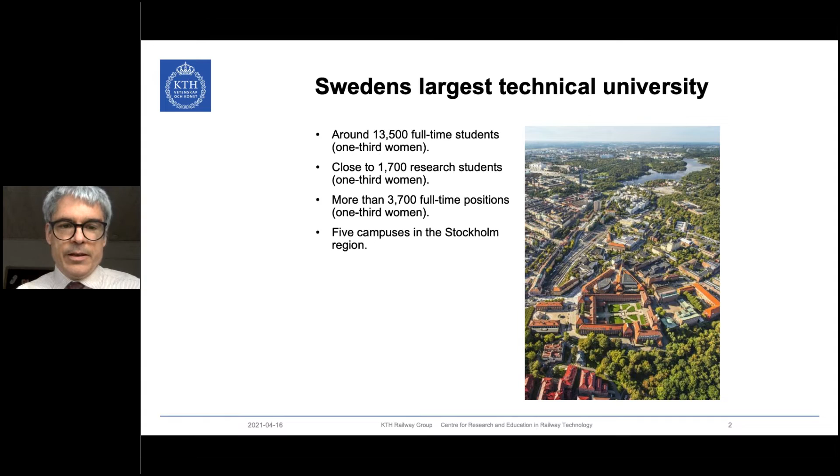Since all of you might not know where I'm from, a very short introduction here. I'm from the Royal Institute of Technology in Stockholm, Sweden, which is the largest Swedish technical university. We have 5 campuses in the Stockholm region. And I'm also, as Chris introduced, director of the KTH Railway Group, which is a multidisciplinary railway research center at our university. We conduct research and actually also education in many different fields of railway engineering. We are in civil, electrical, and mechanical engineering, and you can see just some examples.

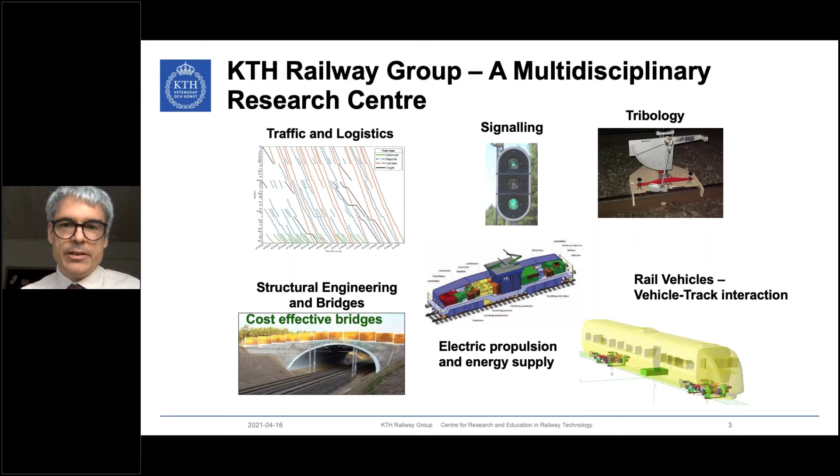We deal with train traffic planning, scheduling, as you can see here, traffic and logistics, with signaling, tribology issues. We have quite a large group working on railway bridges, also quite a big group in electrical engineering working on power supply and electrical propulsion systems. And then we have the group where I am from, the rail vehicle group, that mainly works on vehicle track interaction.

On the next slide, you get a short impression on what the research focus in our group is. As said, it's mainly on the dynamic vehicle track interaction with topics like ride comfort, contact mechanics, damage prediction, active suspension, tilting trains, crosswind stability, and condition monitoring. But we also have some projects on energy usage and environmental impact of railways, lightweight structures, and vehicle catenary interaction.

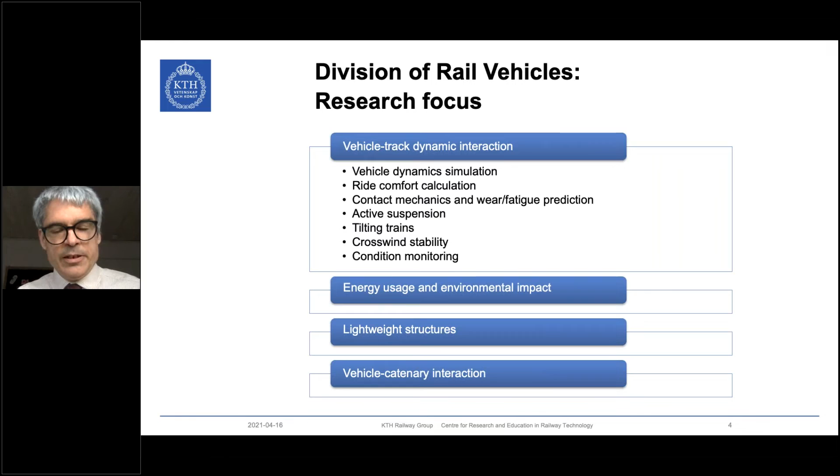And finally, before really starting with the topic today, I don't need to say so much anymore because, Chris, you mentioned it already. We actually have a quite close cooperation between the KTH Railway Group and the RailTec Center. And as you said, it goes quite many years back. And since 2018, we have it officially our joint master program in railway engineering, where students in parallel start at UIUC in Illinois and at KTH.

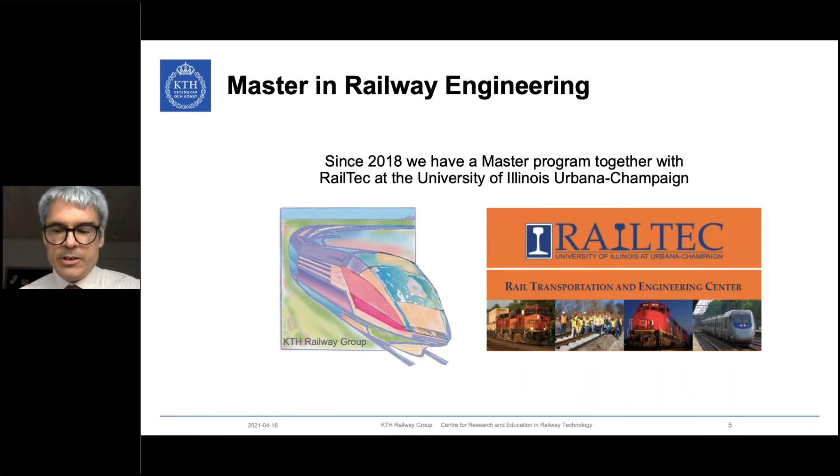Okay, but now to the topic of today. What will I be talking about? After a very short introduction, I will mainly try to explain to you what we are doing by examples. I will not talk so much about theory, but by some examples of what we are doing, hopefully give you an impression on what it is and how it could be used.

I will talk about how our calculations could be used for optimizing grinding intervals, for wheel life prediction, shortly a bit on our activities on machine learning, which are much newer than the other activities, and then shortly summarizing it.

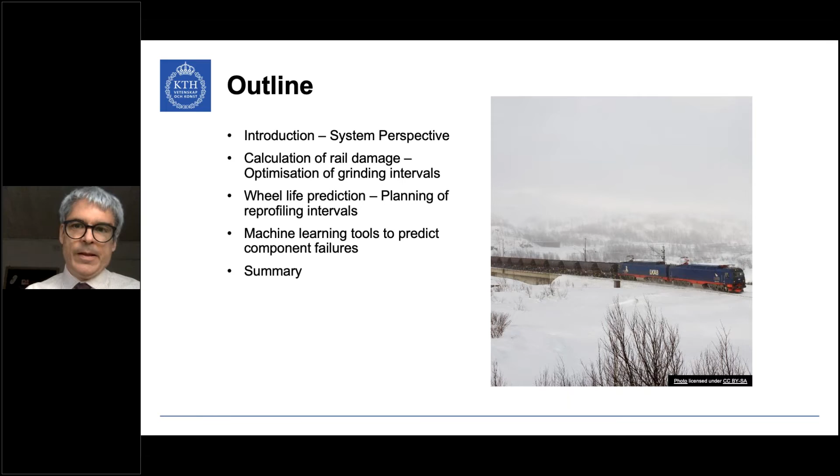As a background, Chris also mentioned it very shortly. Rail damage, rail wear, and RCF, for example, according to information from Trafikverket, which is the infrastructure owner in Sweden, accounts for about 40% of the maintenance and renewal costs in the Swedish network. And also wheel maintenance and renewal is a significant part of the operational costs for the vehicle side. So if you can save some money there, you can save a lot for the total operation cost of a railway system. Another issue is that wear and rolling contact fatigue are interlinked.

You can't really look at one of the phenomena isolated. You always have to look at them in combination. A very obvious reason is that initiated cracks can be worn away if you have wear, which you always have between wheel and rail. So actually a certain amount of wear can be beneficial to not have too fast crack growth in your system. And third bullet point here is that also maintenance activities influence the wheel-rail dynamic interaction. When you reprofile the wheels or when you grind the rails, then you change the geometric interaction between the two contact partners, and that also changes the dynamic performance of the vehicle on the track.

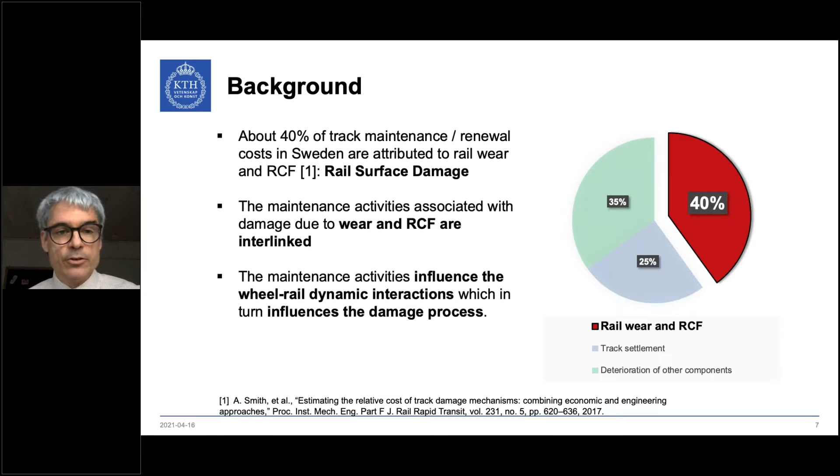So it's a quite complex system that needs a lot of detailed attention if you really want to model it in a good way and get good predictions of the system behavior.

In that aspect, it is also, as I said, a system tool, the wheel rail damage prediction. What would we like to achieve? Like most people would like to achieve higher infrastructure availability, reduce track maintenance, reduce costs due to delays, lower operating costs, and the same on the vehicle side, reduced vehicle maintenance, higher vehicle availability, but also better ride comfort and less running instability, this hunting motion.

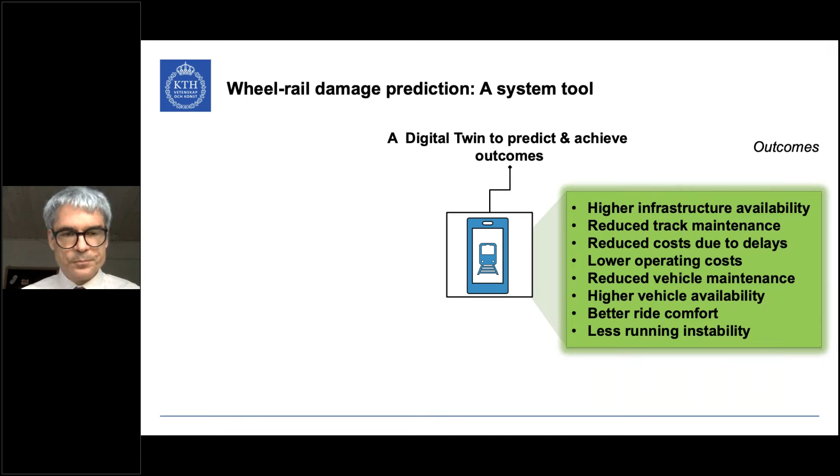To build a digital twin of the system to predict wheel or rail damage, you need quite a lot of different bricks, as I've indicated on the left side. Firstly, you need good multi-body simulation models that really represent reality. You have to deal quite a lot with contact mechanics. You need to post-process the outputs from the dynamic simulation, so you need damage models - how to go from measures like creepages and contact forces to calculating the damage from them.

You need to deal a little bit with numerics, because all these simulations, as you will see later, are iterative, so it can be quite time consuming to do these calculations. Good numerics is also important.

When you want to optimize the system, it's also about optimization - for example, the vehicle suspension design, or you might want to optimize the wheel rail interface management. As I already indicated in the beginning, the geometric interaction between wheel and rail is extremely important. I won't go into the rest of these bullet points.

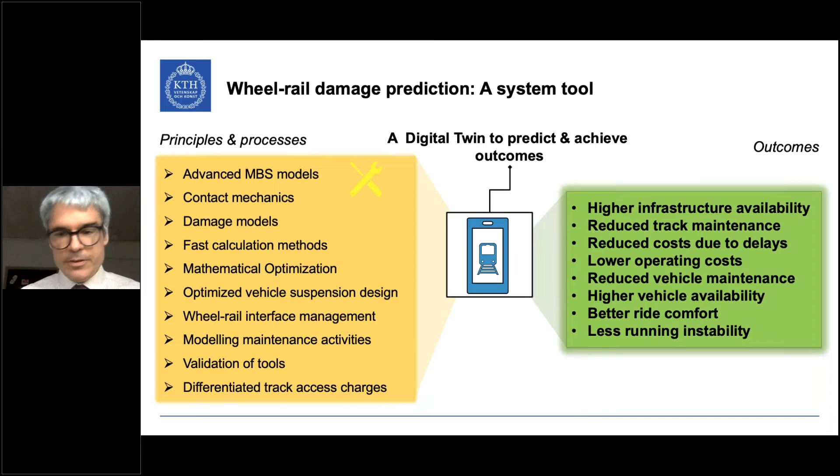We have been dealing with this topic for quite a long time, as you can see on this slide. The first thesis that one of our students did on the topic was in 1999 - the first wheel wear prediction algorithm, at that time for a freight vehicle. Then several theses updated and extended the work - for example, Enblom dealt with RCF, and my colleague Carlos Casanueva worked on switches.

Babette Dirks, for the first time in a systematic way, coupled RCF and wear. Then in 2016, we had one thesis that dealt only with contact mechanics, actually developing a non-Hertzian contact theory needed for exact prediction of damage, but that still needed to be numerically efficient to not extend the simulation times too much, even though the contact mechanics are more exact.

The works which I'll mainly talk about today are, on one hand, from our colleague Saeed Hossein-Nia, who finished his thesis in 2017 and is now a researcher in our group, and Vishak Krishna, who will defend his thesis this fall.

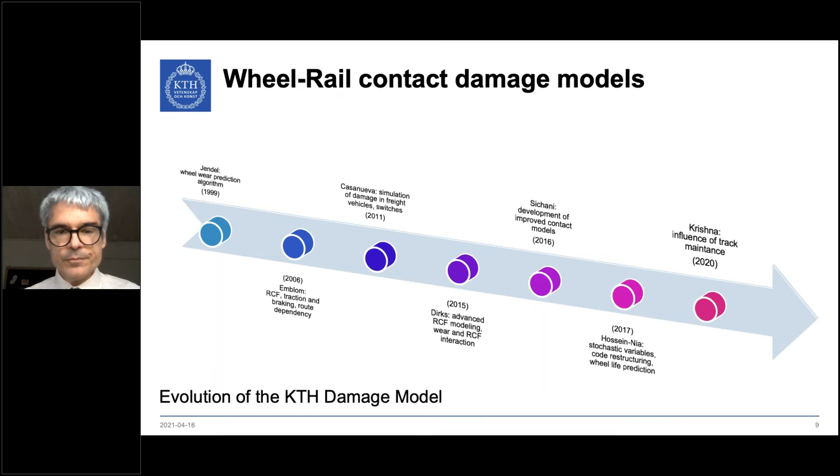As already indicated, the examples I will take up are calculating rail damage in combination with grinding actions, wheel damage with one short example from a recent master thesis, and then finally, though it's not the major part of the presentation, a bit about our recent activities on machine learning.

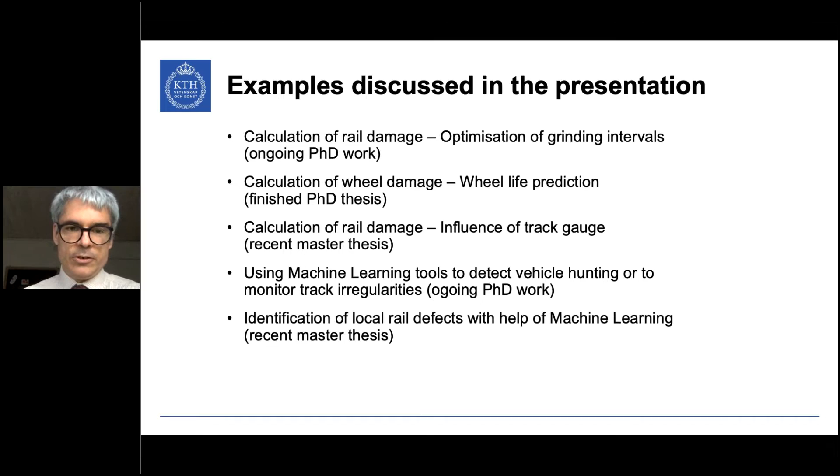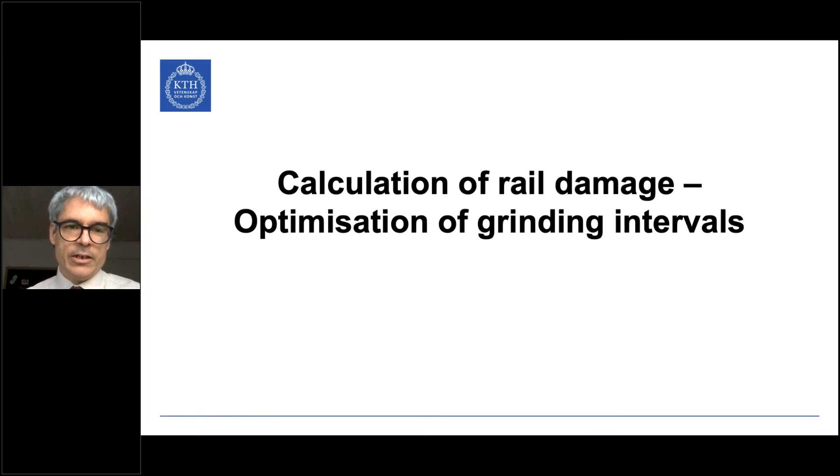I'll start with the work mainly from Vishak Krishna on calculation of rail damage taking grinding actions into account. To explain why we are doing this, I show here measurements that are actually from Germany.

Rail measurements on a rail cross section over 9 years. What you can see is time on the x-axis and wear volume - the volume worn away - on the y-axis. You wear away material due to operation, which you can see by this arrow - that's the wear you get throughout the years from trains passing that cross section. But you also get a significant amount of wear from the grinding actions.

If you do not take that into account when you calculate the iterative change of rail profile, and in turn the interaction between wheel and rail, you miss an important part of what happens with the rail during its life.

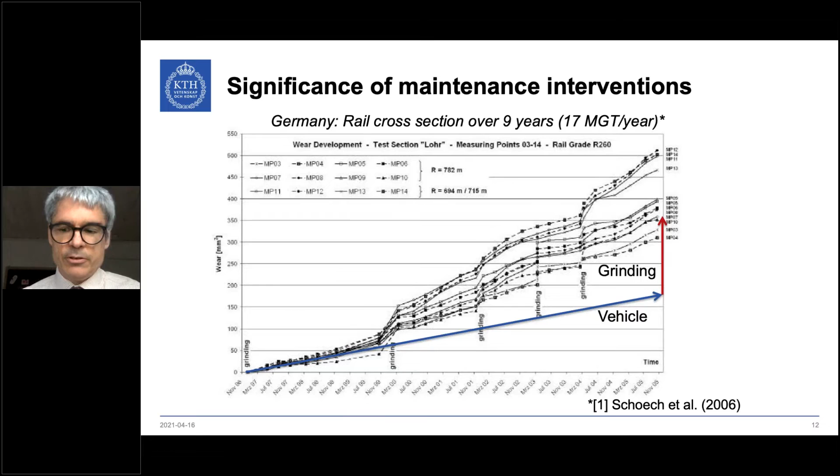A first indication that it's probably not the best idea to grind the whole line at certain intervals can be seen from the Swedish iron ore line, a line in northern Sweden where iron ore is transported from the mines in Kiruna to the harbors, either to the west in Norway or to the east in Sweden.

Here you see a part of the line, and we got grinding schedules throughout the years from the infrastructure manager. Until 2010 they just ground the whole line at certain intervals. Then for some years we did not get information - I really don't know why - but in recent years they did not grind the whole lines; some parts were ground more often, more frequently than others.

If you compare it to the curvatures, to how the line is built, you can see that the parts with tighter curves are ground more often nowadays. So from experience, they already introduced a more intelligent grinding scheme than just grinding the whole line. What we were thinking is that by using rail prediction, perhaps you can make it even smarter and save even more money for the operation.

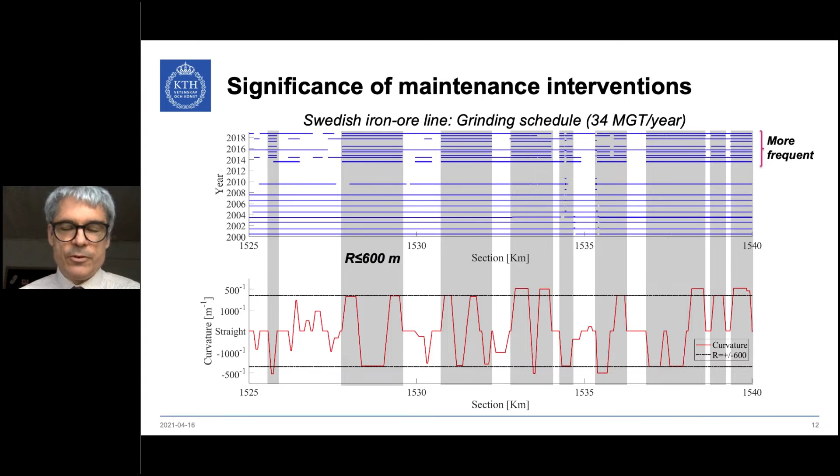What is then needed to predict the rail surface damage?

On one hand, a good vehicle model that includes all data needed, suspension data and so on. You need a lot of track information, the general track layout, track irregularities, and rail profiles, of course, but you also need to know quite a bit about the operation, about possible traction and braking, the real speeds on the line, and environmental influences like friction, which typically we assume stochastically, but you need to know something about the distribution of the friction.

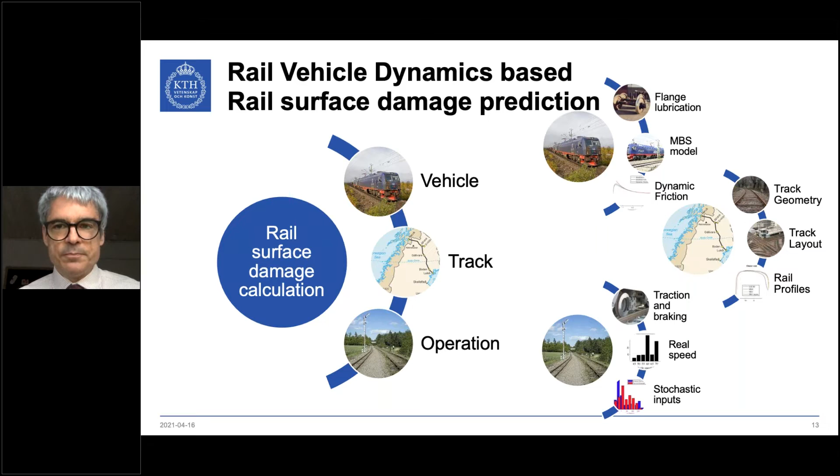And how do we do the simulations then? This is actually not something that was introduced in the first thesis we had on that topic. With a model you have, and the knowledge about the track and the operation, you define a number of operational cases, and then you do the simulations.

Take out the relevant output data from the wheel-rail contact, and then with the damage model you calculate the wear on wheels and rails. In this case, mainly the rail is interesting. Then you update after a certain time the rail profiles, and if you have already achieved the tonnage passing you want, then you take out some key damage indicators, for example, like worn off area, change in flange height, flange thickness, things like this.

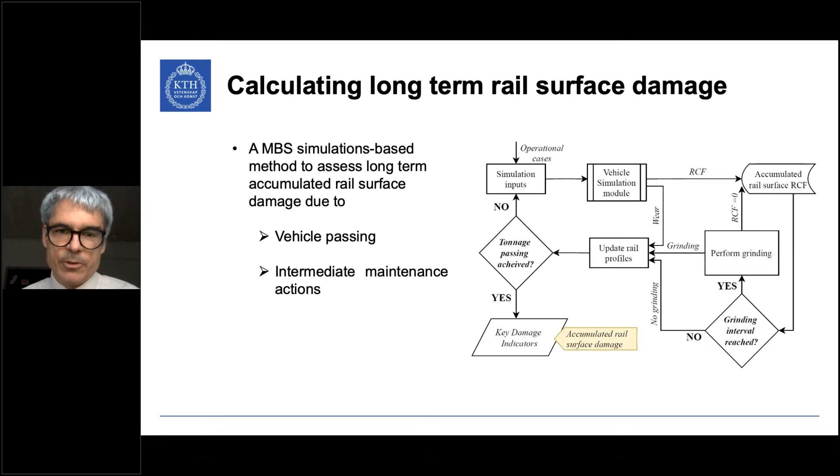As shown from the measurements in Germany, also from grinding we take away material. And then we have done calculations. Here we actually also compared two different bogie designs, because that was done partly within an EU project, where the EU project was called FR8RAIL, where a new bogie type, a modified Y25 bogie.

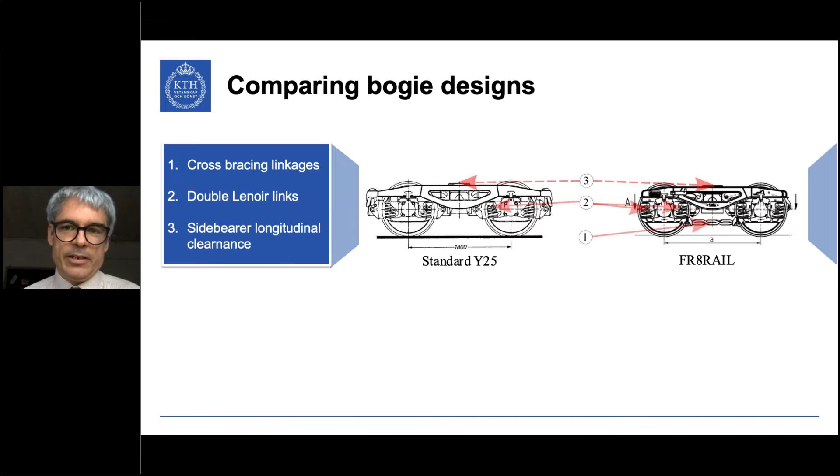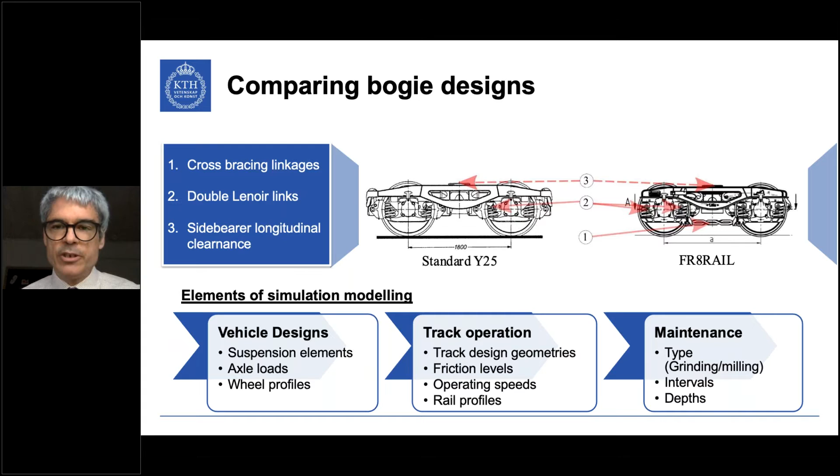Y25 is a very common European freight bogie. A modified bogie was developed, and our task was to investigate how track friendly that new bogie is compared to the standard bogie. Yeah, I already talked about that. You need vehicle design, track operation, and maintenance type. And here on this slide, you can see the results of our calculations.

To the left, you will soon see how the wear increases. You can see both the wear from the vehicles passing and also from the grinding action. In the center, you will see how the rolling contact fatigue develops, but then after each grinding, rolling contact fatigue is set back to zero. That is an assumption we make, that the grinding is able to fully remove initiated cracks.

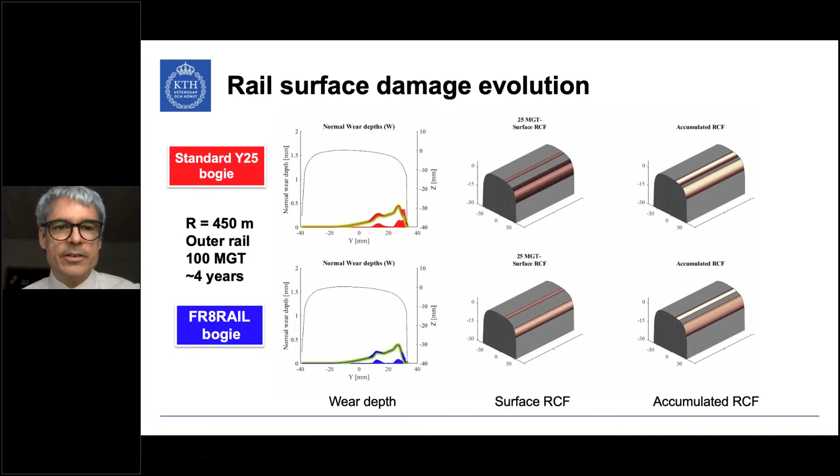And on the right side, you will see how RCF would develop if you would not reset the RCF with a grinding action. So here you can see the results developing. You can see the mega gross tons increasing. We simulate until about 100, or perhaps even exactly 100 mega gross tons. So you see the wear increasing, RCF developing and then ground away.

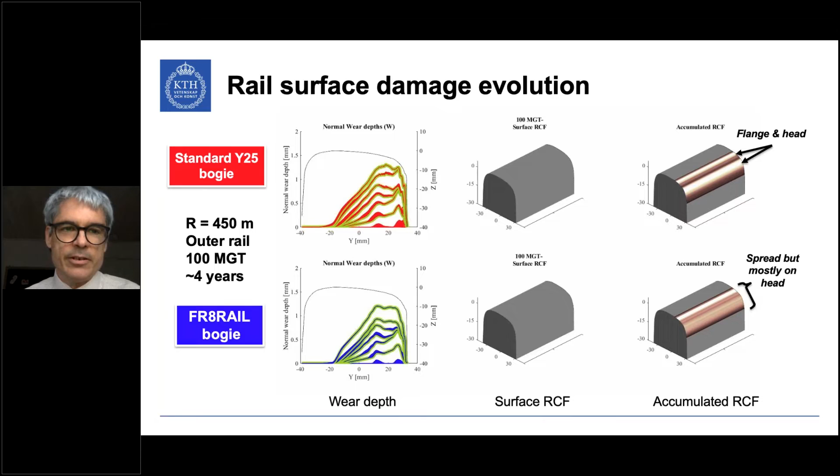And here is how it would look like if you don't reset. You can see the picture of RCF developing for the two different bogies is a little bit different, because the FR8RAIL bogie on the lower line is a more curve-friendly bogie than the standard freight Y25 bogie.

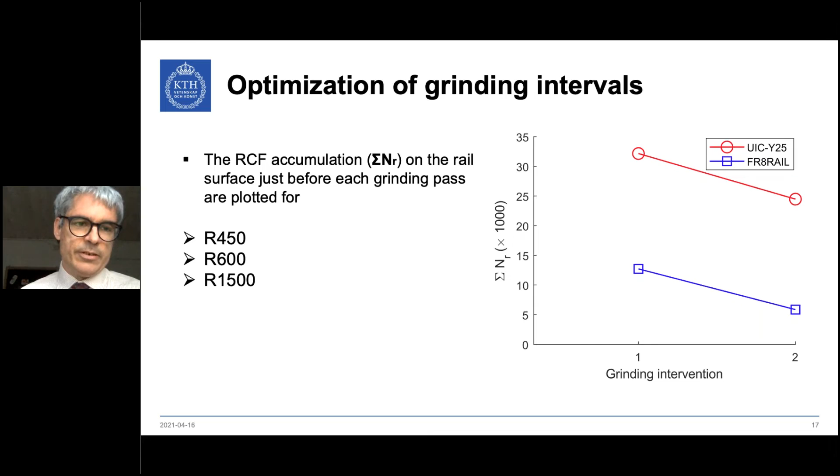You can see it a bit here also how the different bogies with respect to rolling contact fatigue risk would behave in different curve radii, and especially obvious it becomes, for example, in a 1500 meter radius, where you see that the curve-friendly FR8RAIL bogie would lead to significantly less risk of rolling contact fatigue.

And that, for example, could be used to optimize grinding intervals. When you, for example, know you introduce a new type of running gear that is more curve-friendly, then you can calculate how much you can extend the grinding intervals.

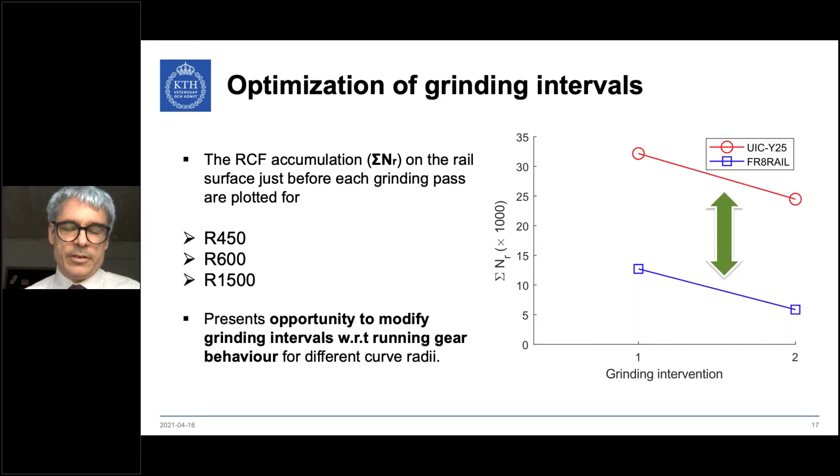But you can also use the calculations to see if you have very special weather conditions. For example, you have faced some months where it is extremely dry, and you could use this type of calculations to see, do I need to grind a little bit more often now because of the changed operational conditions. So all these things that could happen, or if you want to change the rail profile, you could see how does this influence and how could I change the grinding intervals due to a change of the rail profile.

The second example I want to show you is on calculation of wheel damage and the wheel life prediction model that is mainly developed by Saeed Hossein Nia in our research group. That is actually done fully on the iron ore line with the iron ore vehicles, and what I am showing today is for the wheels of the iron ore locomotives.

This is an operation in northern Sweden, very far north, so it's very cold there in winter, and it's winter for a very long time. They have snow for perhaps 7-8 months during the year and down to -40 during winters. It's 30-ton axle load with, I think, 68 iron ore wagons after this locomotive with 4 3-axle bogies.

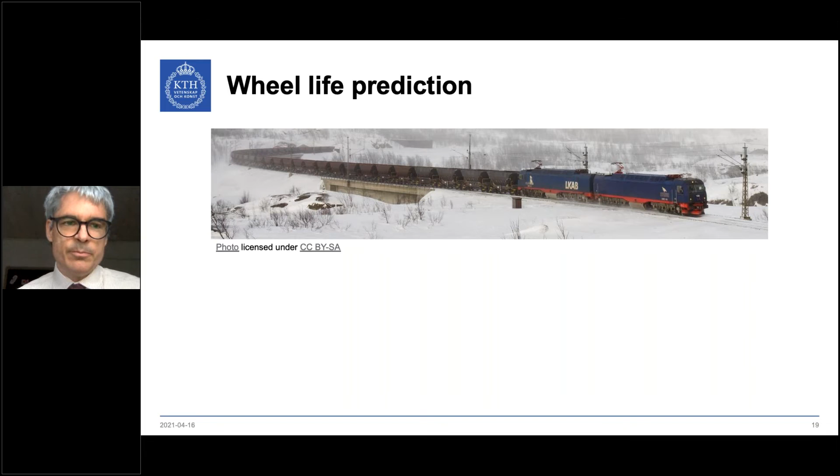If we could tell the operator, as a result of our simulations, that after 50,000 kilometers, 3/4 of the wheels need to be reprofiled, then the workshops can do a good maintenance planning there.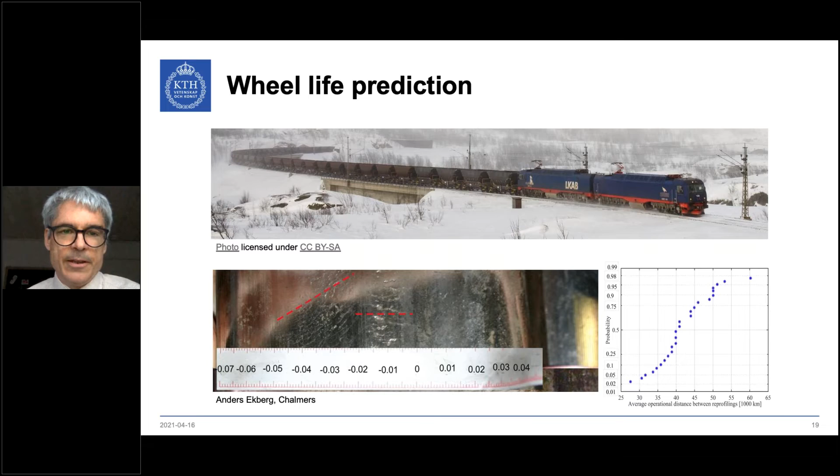The logic of how we do the calculation is basically the same. Again, you need a good vehicle model to track the operational information, and this time, since it is about the locomotive, you also need to know about the flange lubrication that you have. We also had to introduce at least a simplified model for the traction control, because that is of course also important for the creepages that arise in the wheel rail contact. So you need to know quite a bit about that also.

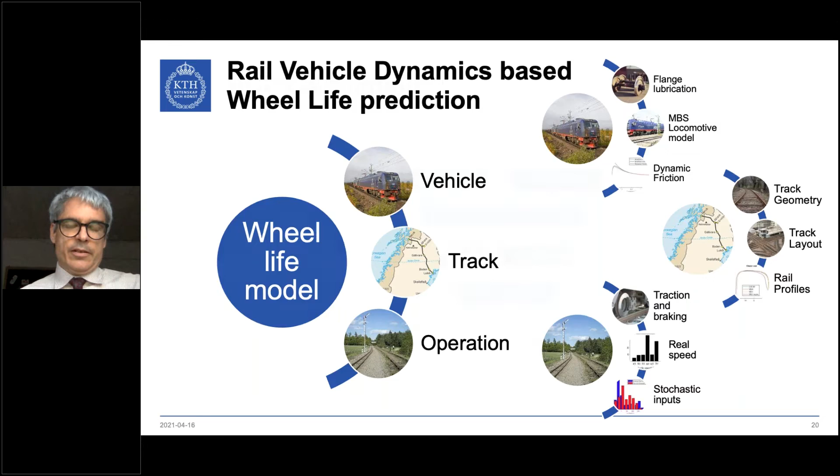As said, the simulation is very similar. We need a simulation set, we need the vehicle model, we calculate the wheel rail contact response. With the damage model, we calculate both the wear and the rolling contact fatigue. Then after a certain mileage, we update the profile, and either we say okay, we are satisfied, we take out the final results, or with the updated profile, we go back to the beginning and redo the calculation.

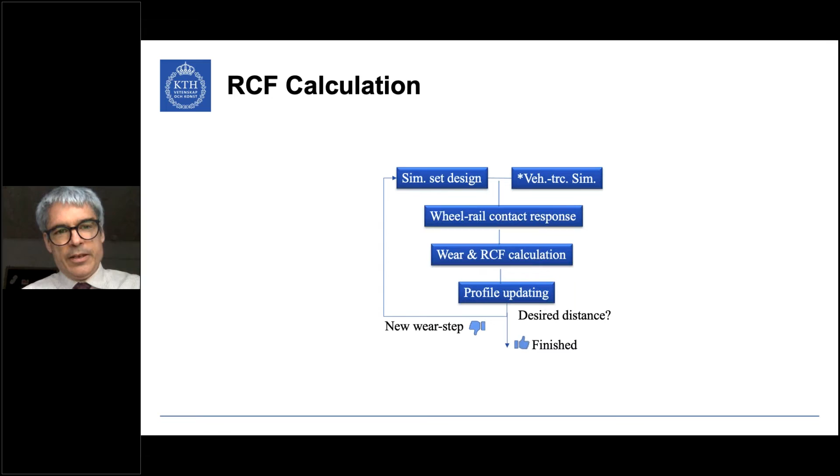Here I still want to give you some impression on how we do the damage calculations. Firstly, the contact patch is divided into a number of elements, say about 40 elements for the contact patch. Then for each of the elements we check if the yield limit in shear is exceeded, and if it is exceeded, we increase the count, because there is the risk of rolling contact fatigue. If you look into Professor Johnson from Cambridge's shakedown theory, it says if you exceed that yield limit, then there is a risk for rolling contact fatigue.

So from that we get such pictures where you can see, depending on the color, how many instances you had where that limit was exceeded, and also where exactly on the wheel those are.

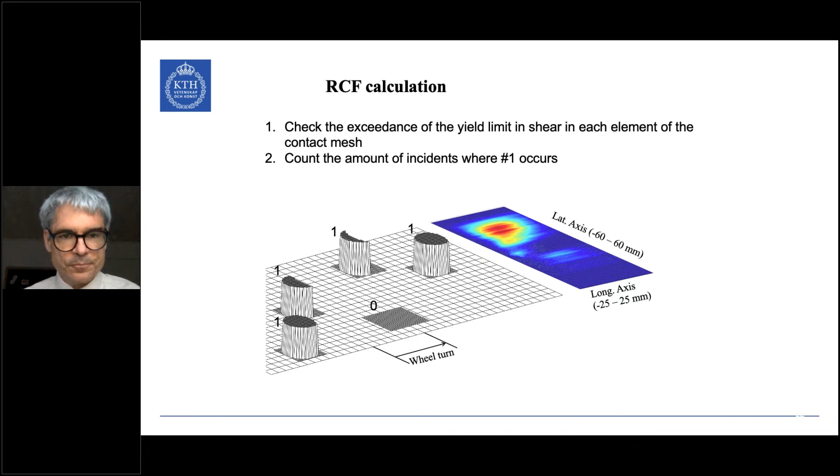But as I said from the beginning, rolling contact fatigue and wear are interlinked. Therefore, we also always calculate the wear. Firstly, we needed to know how the profile changes, because the profile change also influences the contact stresses and the risk for rolling contact fatigue. So you have to do this in parallel.

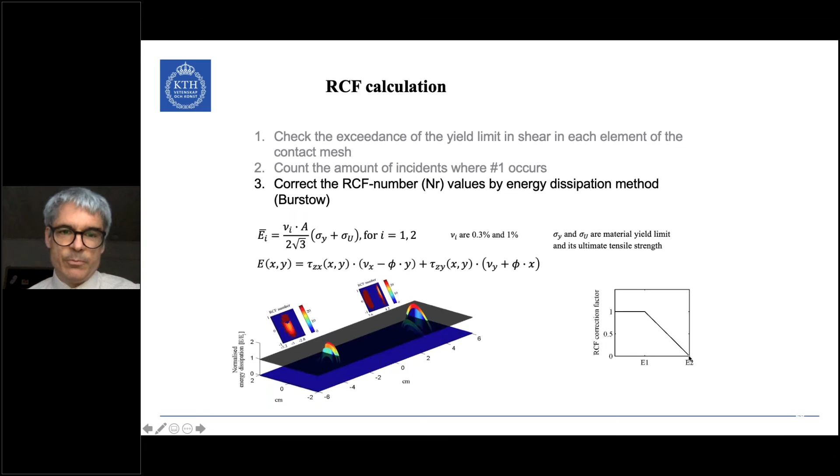But we also do this to judge how it might influence, or how it will influence, the crack growth. If there's a lot of wear, we actually reduce the influence of the stresses on crack growth with a certain equation. I don't go into the details here. What is important is, if you have low energy dissipation in the contact, that is an indicator for how much wear you have, and you don't modify the RCF calculation. If you have very large energy dissipation, then you say you don't have any rolling contact fatigue risk at all, because you wear away all initiated cracks, and then there is a linear interpolation between those two zones.

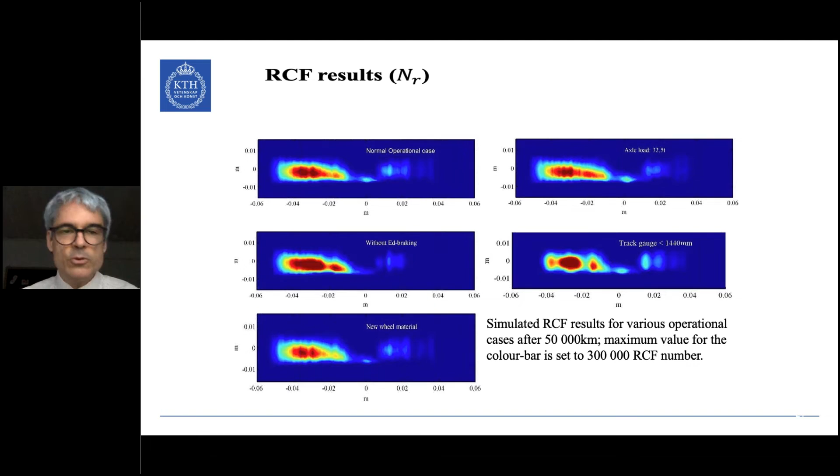These things you could investigate, but you cannot yet get an absolute measure on after how many kilometers running distance you would need to reprofile. That's only a relative measure. So there's something more needed.

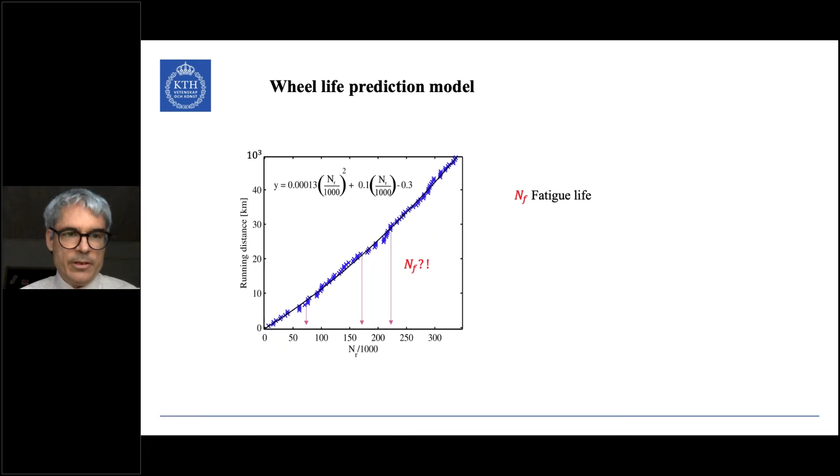So what we can say up to now is how many exceedances of the shakedown limit we have with respect to running distance, and we can approximate this with a function. But how do we come to the fatigue life?

There again, we cooperated with our colleagues at Chalmers in Gothenburg. They have done laboratory tests on the rail materials and developed basically Wöhler curves for the material, showing, depending on the surface stresses, when the material fails.

With that information, we can calibrate our results so that we can also give an absolute measure on when the wheel fails, when it needs to be reprofiled.

It turned out that we, with quite good agreement, could predict the probability for the need of wheel reprofiling that we got from the statistics from the workshop I showed you in the beginning. This is the measurements, just drawn a little bit differently.

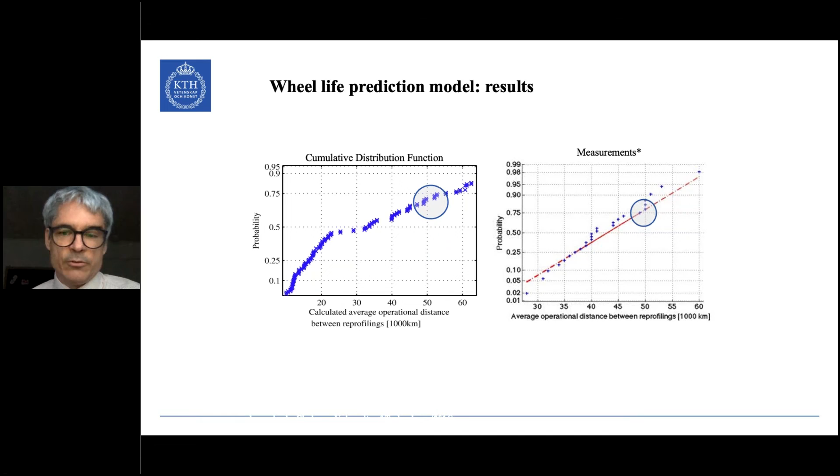Here you can see the result we would get from our simulations. We would also predict, like the statistics from the workshop say, that after about 50,000 kilometers, 3 of 4 axles would need a reprofiling.

On the next slide, I first show you shortly how it looks when the wheel profile changes. Down here you can see that we again match quite well with measurements of how the wheel profile develops with respect to running distance.

Here you can see some parameter studies. Again, like for the rail, also for the wheel, you could predict what would happen if you have a very dry period, and how much more wheel reprofiling you can expect so that the workshop is prepared.

What would happen if the lubrication on that line stops working? They also have lubrication installed in the infrastructure, and in winter it's not always sure that this is working. So you could calculate, if they detect that the lubrication has not been working for a while, how would that influence the wear and rolling contact fatigue on the wheels?

How much faster would you need to reprofile? Things like this you could forecast with the help of this digital twin, with these calculations, helping the workshop in maintenance planning.

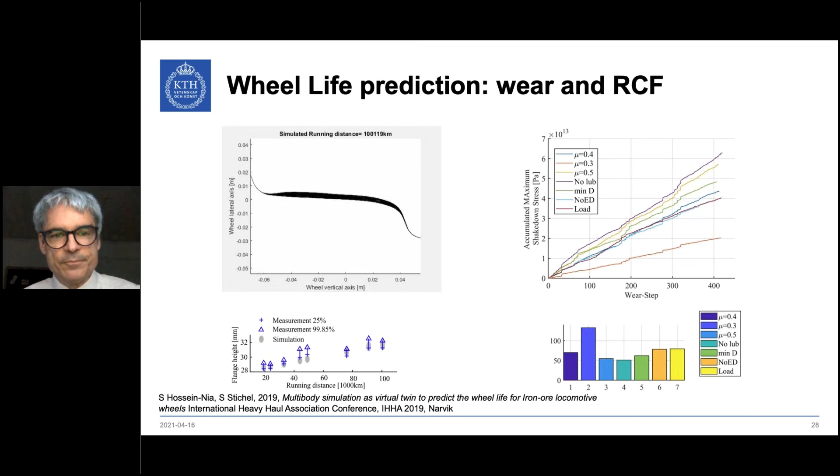One very short example also, a quite recent master thesis we did together with the infrastructure owner. What we have seen already a number of years ago in our simulations is that rail damage increases with increased gauge. On heavy haul lines, you typically have something called gauge widening, where the gauge becomes wider and wider after a while.

That is typically not beneficial for the stress levels that arise in wheel and rail, because you get into contact at parts of the wheel and rail which are not really designed for contact. You get very small contact patches and very high stresses. So there are regulations on the iron ore line that the track gauge should not exceed 1450 millimeters.

Then they should do something about it. They wanted our master thesis student to use the digital twin to do calculations and either confirm that operational limit or suggest a different limit.

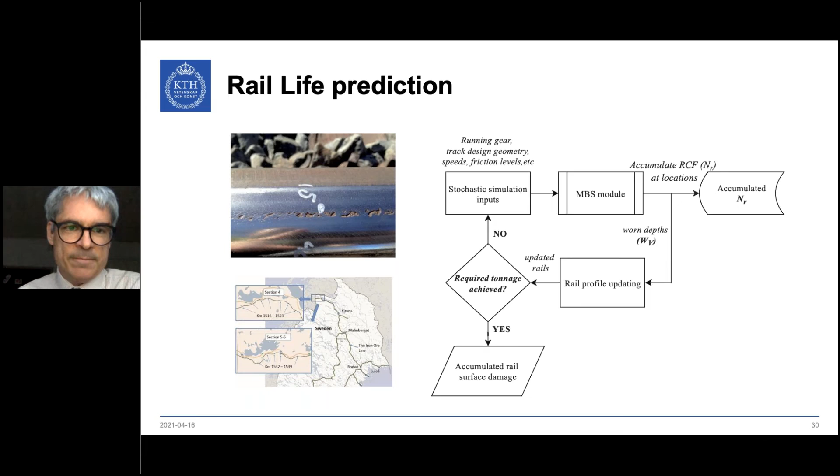So again, he did simulations according to our iterative damage prediction model. I don't need to go into that again. Then he calculated again the wear and the risk of rolling contact fatigue. And again, some calibration was needed.

We knew exactly from information we had that in one certain curve, after 105 days, so much rolling contact fatigue had developed that they needed to do something about the rail. So we calibrated our calculations to that.

This is the black horizontal line we have there, and everything above that value, Trafikverket said that is definitely not okay. So we calculated how the track gauge influences the time until this rolling contact fatigue arises. You can see here that it is around 1450 millimeter track gauge that you exceed that value.

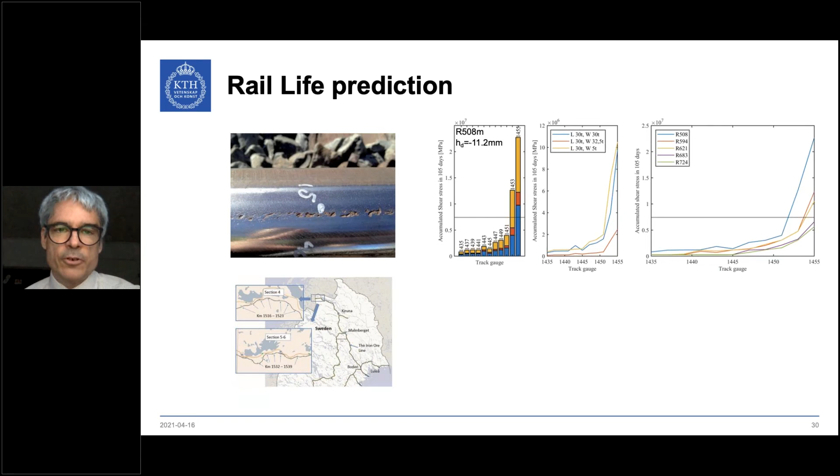And also when we did it for a number of curves, different curve radii, you could see that if you are above 1450 with your track gauge, then the RCF risk very steeply increases. So the operational limit they had chosen, mainly based, I think, on experience, was actually a quite good limit.

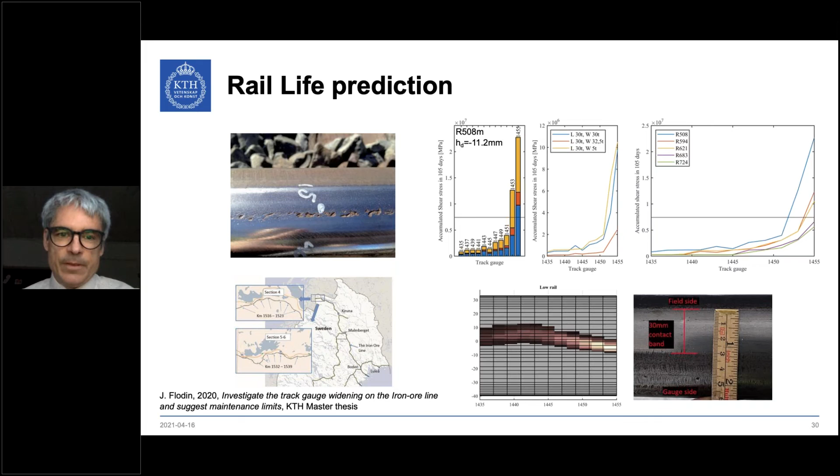So not very much left now, because the final part I want to keep quite short. In the last 2-3 years, we started more and more to also use machine learning algorithms, like many people do, for prediction of damage, or not only damage.

Applications that we have worked with up to now include detection of track geometry that is out of limits, local track defects, running instability of a vehicle, or component failure, for example if a damper is not okay anymore. For all these effects, we use vehicle reactions.

The idea behind presenting this is that on one hand you have a lot of measurements available, and you can train your algorithms so that once trained, the algorithm can forecast under which conditions the system is not okay anymore. But if you don't have many measurements available, it's not easy to get a lot of measurement results. Then you could use the simulation models, the digital twin, to produce a data set that you can use to train your system.

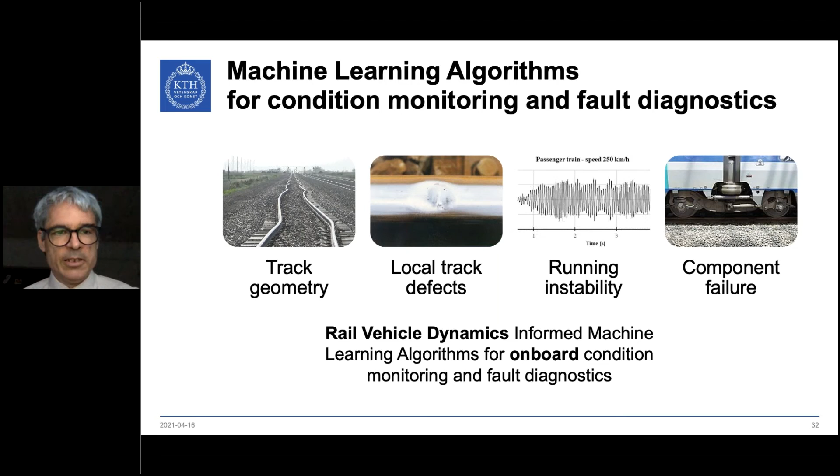We have done this for these different types. One study, for example, was to use vehicle reactions to determine if a track irregularity is outside the limits, if there's something that needs to be done on the track. As said, either you need measurements or you produce the results by simulations.

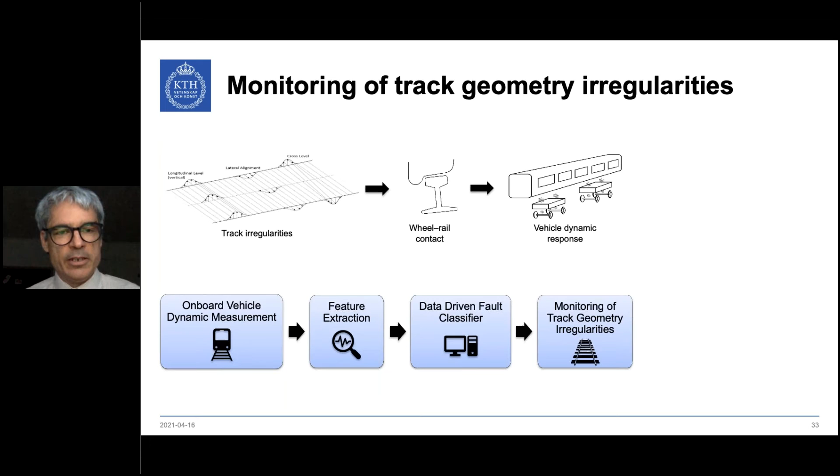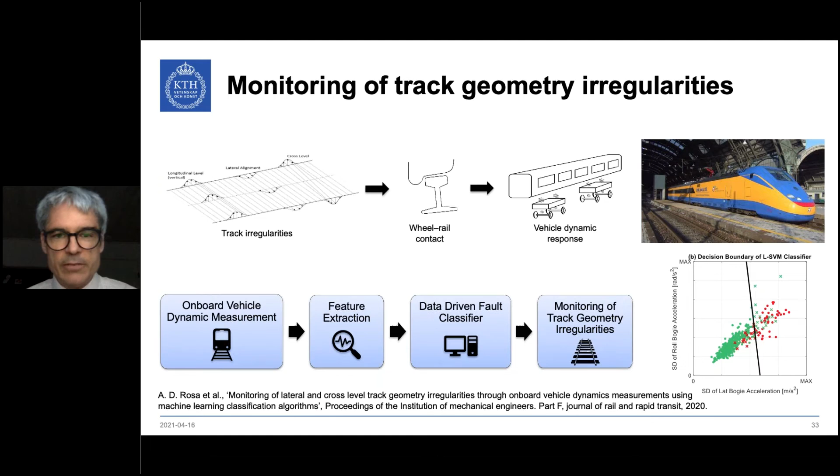Then you need to extract some features, something which can indicate if there's a problem, and then you can train your system. In the case of track irregularities, for example, you can use the standard deviation of bogie acceleration and standard deviation of bogie roll, lateral and roll acceleration, and then define a boundary to see, depending on the vehicle reactions, whether the track is okay or not.

To summarize, the presented tools to a great extent show very good agreement with field observations, and we think they could therefore be used to optimize either rail grinding or wheel turning intervals with respect to the track section. On one section you need to grind more often than on other sections due to operational changes, very dry periods for example, the vehicle type, changes of wheel or rail profile, or others. Also, our simulation tools could be used to train machine learning algorithms to detect failures in the system.

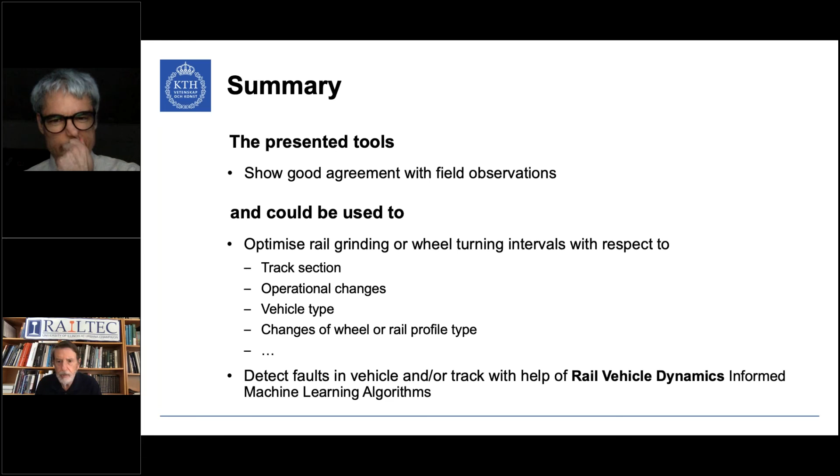Okay. Can you provide more detail about the method used to determine the RCF damage accumulation? You mentioned that you used the curves developed in partnership with Chalmers, but this individual would like to hear more about the lab tests.

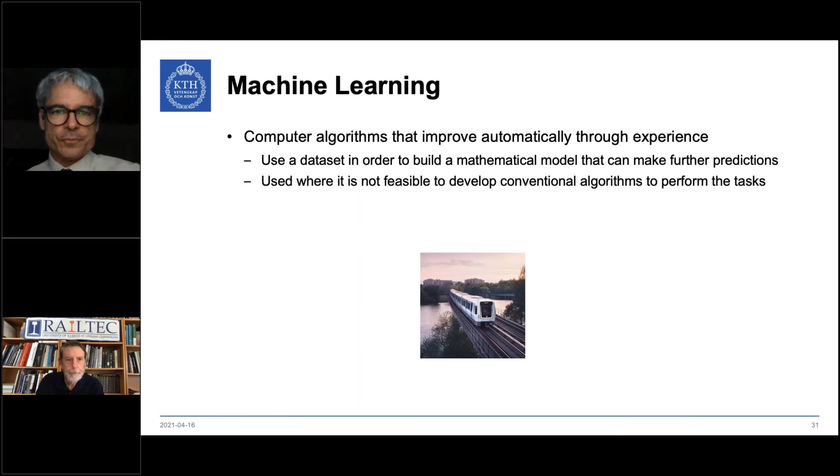Yeah, the lab tests were done at Chalmers. I can go - where was it here? Since they were done at Chalmers, we haven't done it in our lab, so I don't know all the details.